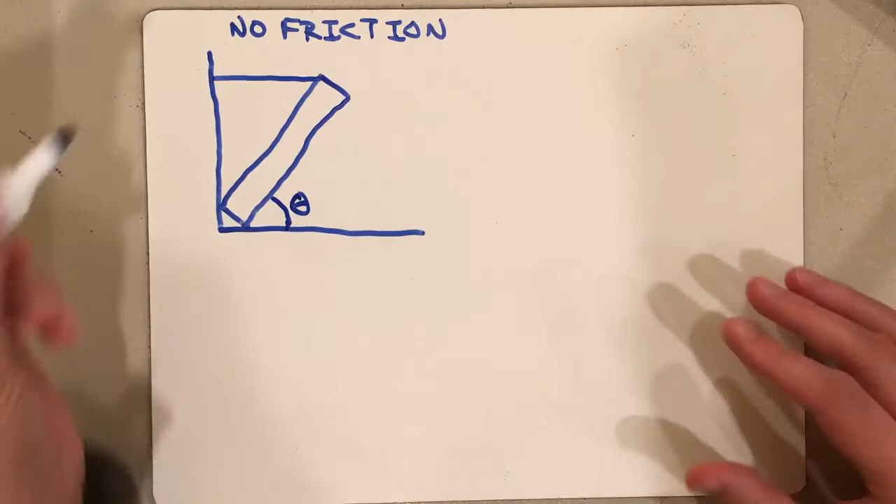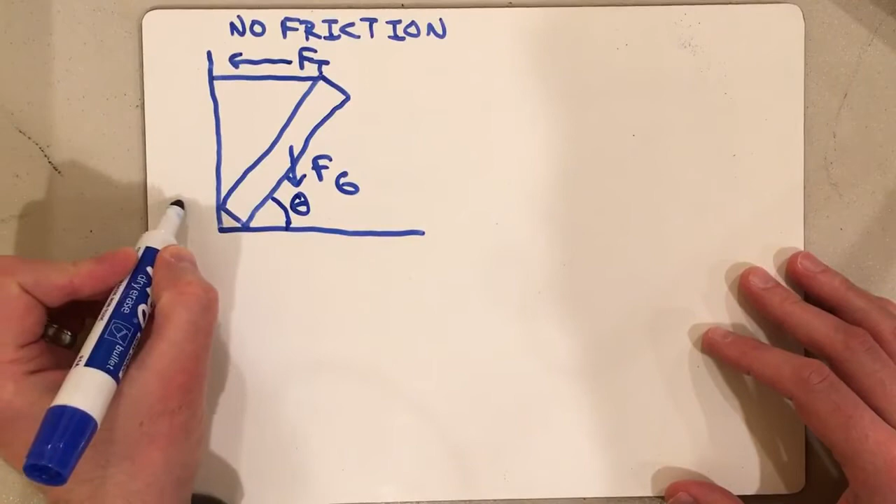The first thing I want to do is draw my forces. So of course I've got tension here, gravity pulling from the center, and here the two corners of this beam, one's touching the wall, one's touching the floor, there's going to be normal forces on each of these. So there's going to be a normal force going this way, which I'm going to call Fw for the wall. And this one I'll refer to as the normal force, but it's the normal force from the ground. This is the normal force from the wall.

So then, next thing to do is set up Newton's second law. I can start with my x forces. I have 2, so this is going to be Ft minus Fw equals 0. And I can deal with the y forces. This is going to be Fg minus Fn equals 0.

For both of these, this is equilibrium, they both equal 0. So I could have said Fw minus Ft equals 0, or Fn minus Fg equals 0. It doesn't change anything, the formulas are still equally valid. This is just how I chose to do it. But this is Newton's second law, both the horizontal and the vertical.

Now the next step for solving these kinds of problems, because probably this isn't enough to solve the problem, whatever it is you're looking for, you need to set up your torque equations. So the next part here, let's set up the torque equation.

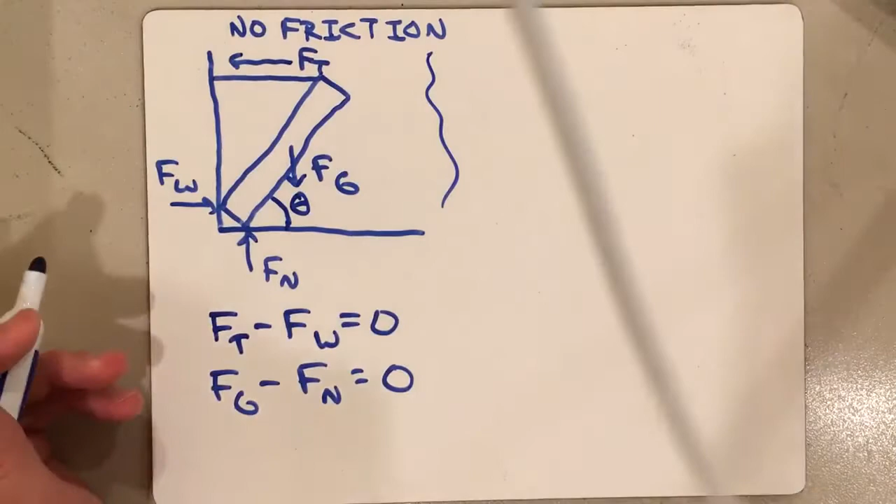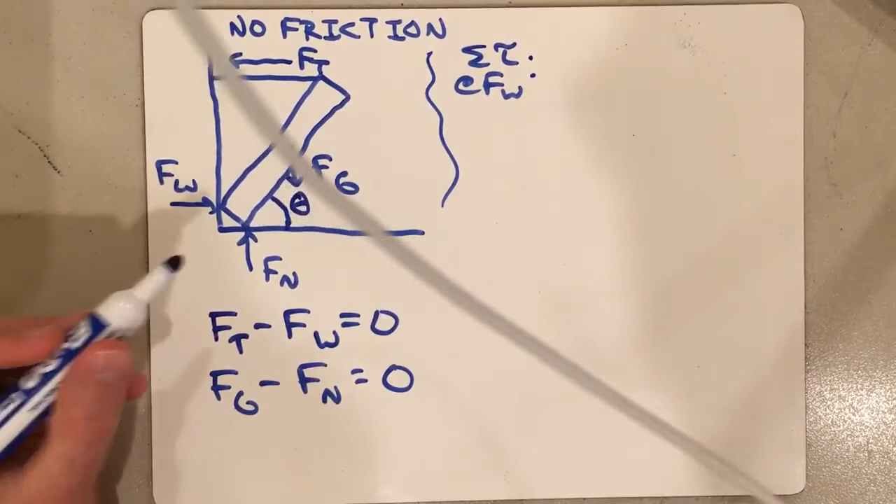I'm going to start with down here. So I'm doing sum of the torques, and I'm choosing at, say, Fw. Now Fw and Fn are essentially acting at the same point, so they're both at this rotational axis, so neither one is going to exert a torque about this rotational axis. Their lever arms are both 0. So I only have these two.

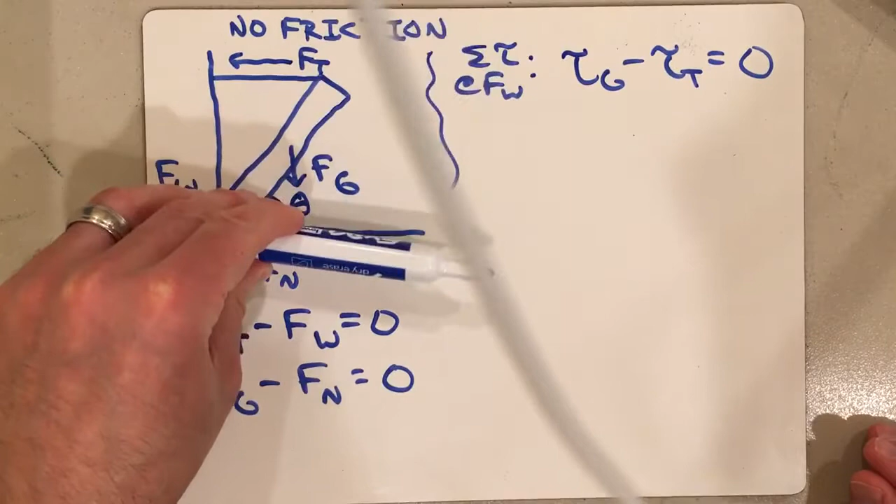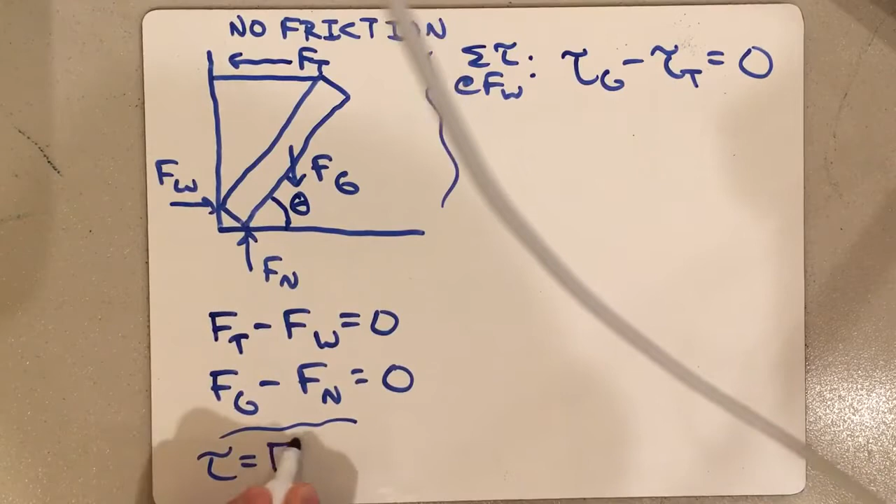So I've got the torque due to gravity minus the torque due to tension. And you can see these are opposing each other, these torques, because gravity would want the beam to rotate clockwise, but tension wants it to rotate counterclockwise. So they are opposing each other. Here we go for this torque. Okay, now let me just remind you, I'll write it down here. Torque is the force times the lever times the sine of the angle between the force and the lever.

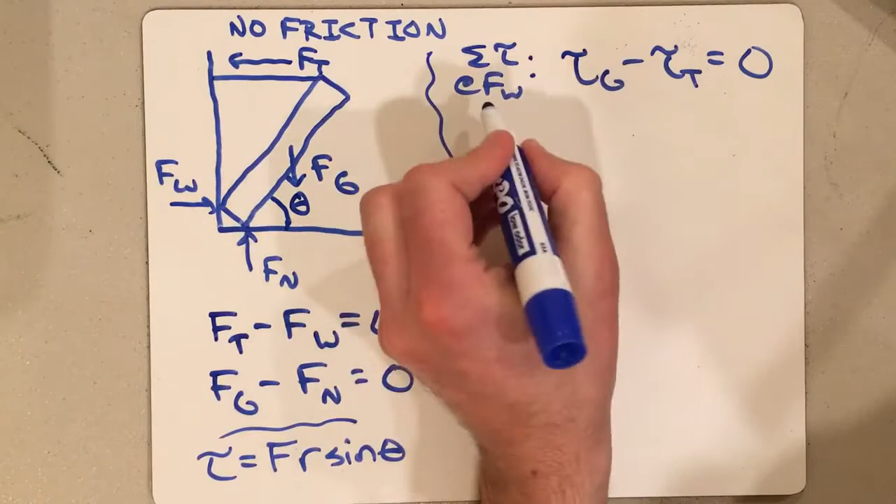So coming back up here for the torque due to gravity, that's going to be Fg. The lever, it's going to be half the overall length. So this beam has a length of, say, L, so this is half the length, so its lever is L over 2.

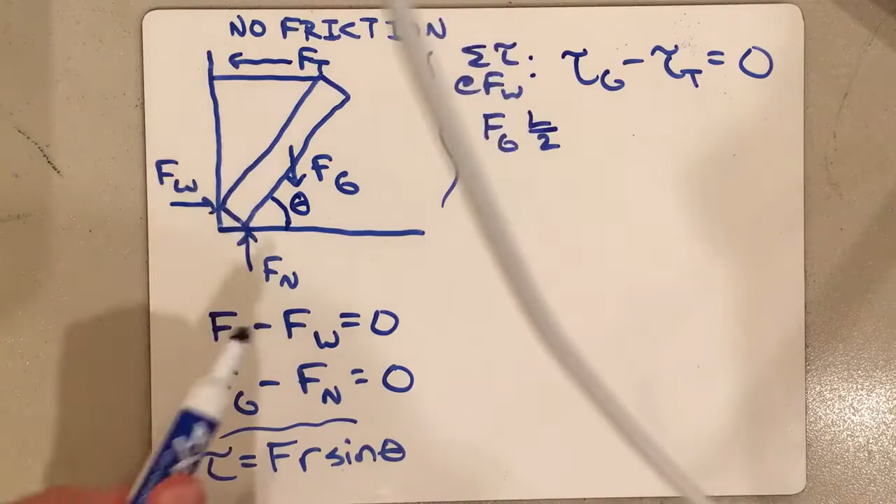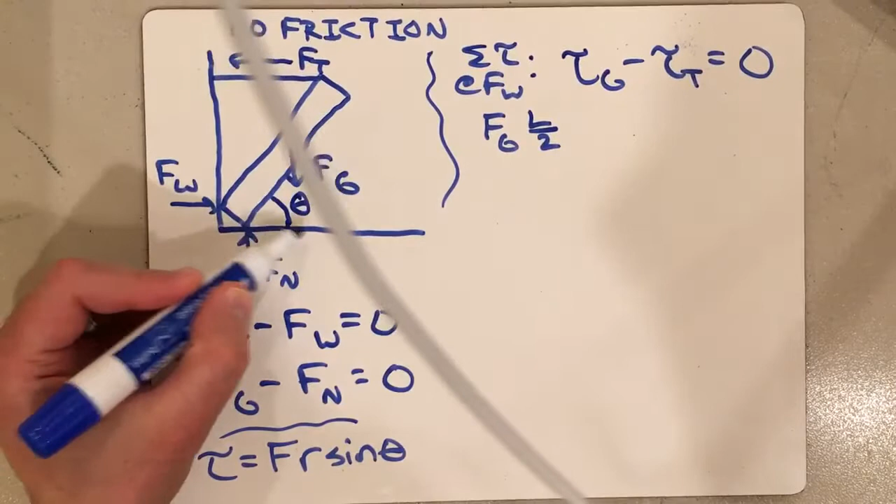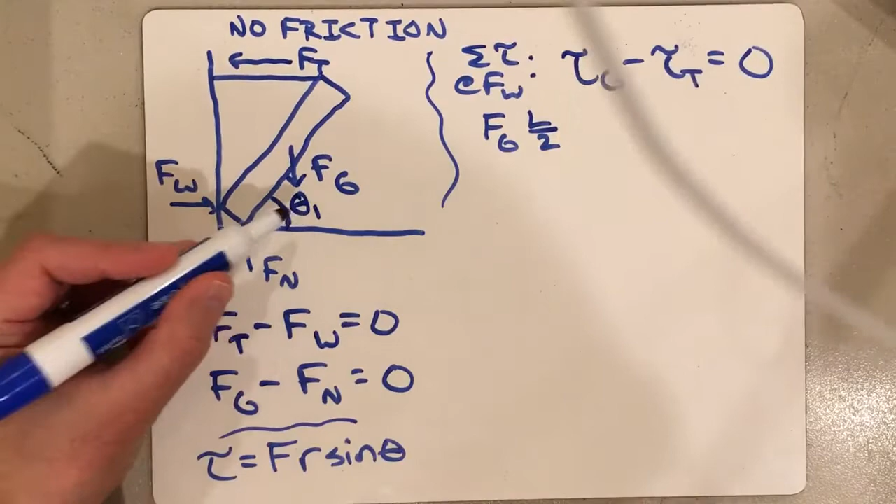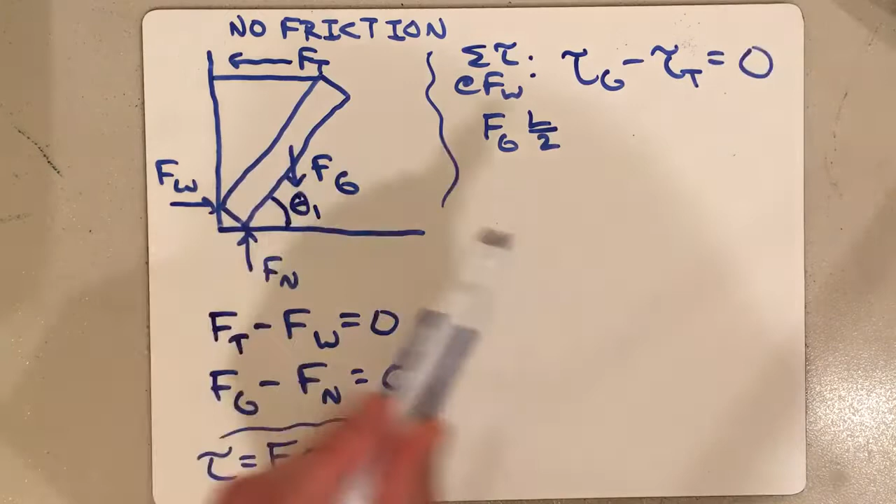And then the sine of the angle. I need the sine of the angle between Fg, which is vertical, and the lever, which is parallel to this beam. Okay, well, here we have the angle between the beam and the horizontal, that's theta. So that means it's kind of a bad choice here, calling this theta and theta. We're stuck with it. Anyway, so using this angle, which is for my actual problem too, but let me just call this theta 1, just to differentiate it from this general angle. Okay, so this theta 1, this is the angle to the horizontal, but I really need the angle between the lever and Fg, so that's going to be the sine of 90 minus theta 1.

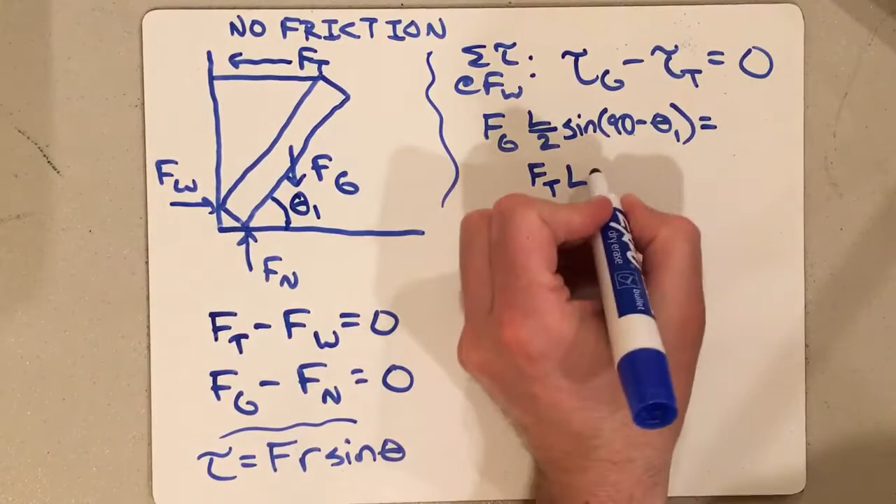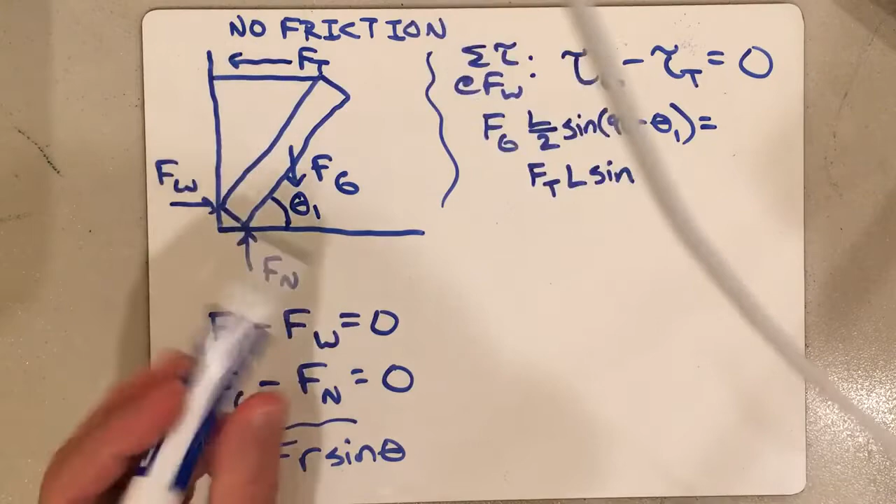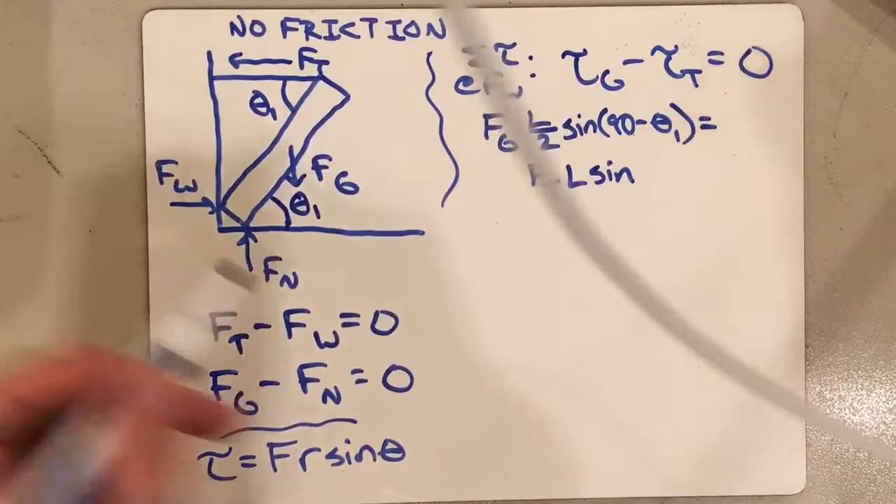And that's going to have to equal, now my torque due to tension is going to be Ft. The lever is the whole length of the beam, L. And that's going to be the sine. Now here, I need the angle between the lever, which is again parallel to the beam, and the tension, which is horizontal. So this angle here, this is just geometry. What is it, opposite interior angles or something like that. But because this is horizontal, this is horizontal, these are parallel lines. But anyway, this has to be theta 1. So this is just the sine of theta 1. So there's one torque equation right there.

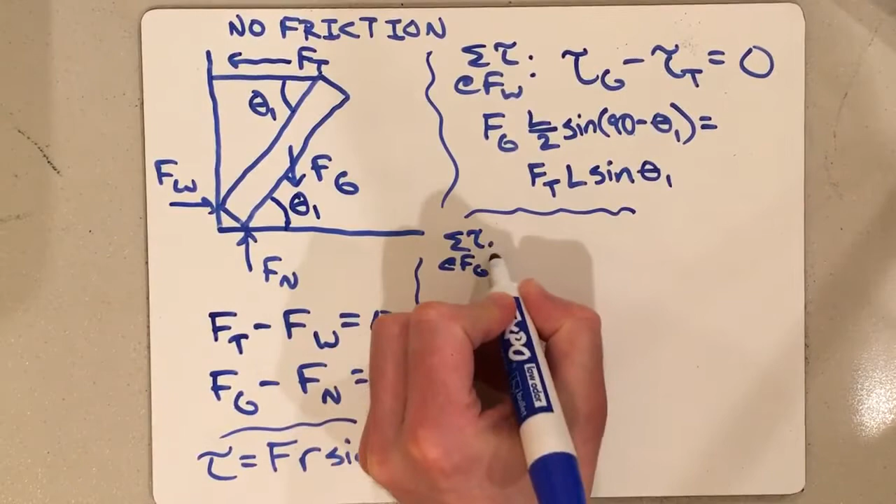Now I can choose again a different rotational axis. I could choose to do the sum of the torques at FG. Okay, so if I'm doing the sum of the torques at FG, this is now my rotational axis. So I'm going to have the torque due to tension.

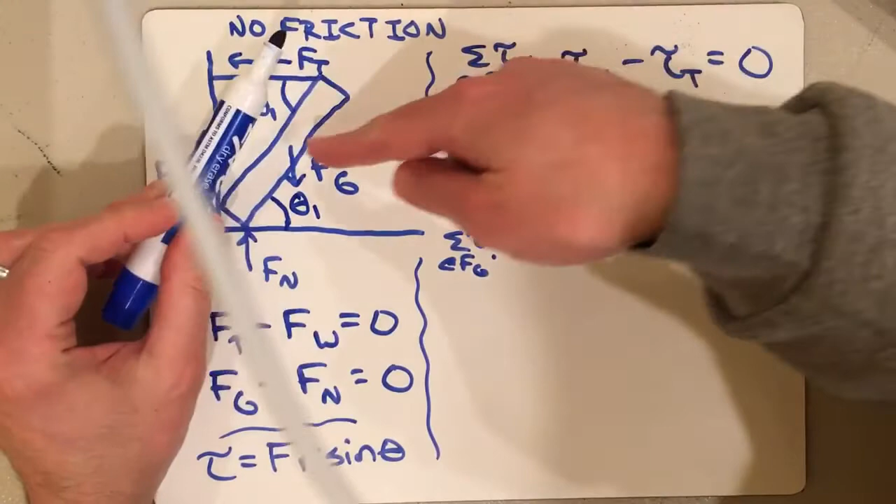Now, tension wants it to rotate, if this is the rotational axis, tension wants it to rotate counterclockwise. And in fact, so will Fw. Fw wants it to rotate counterclockwise, but Fn wants it to rotate clockwise. So I would do the torque due to tension plus the torque due to the force from the wall minus the normal force from the ground. That has to equal 0.

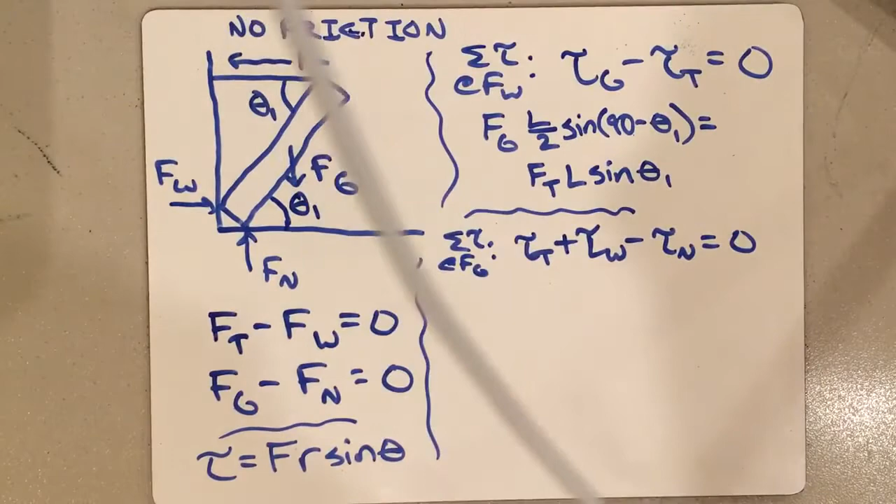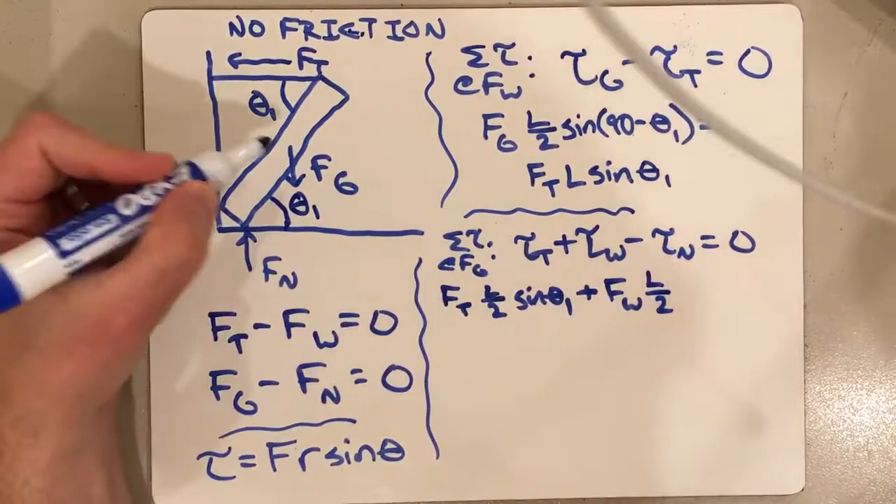Okay, now I set up my, now I can go in and plug individually. So for tension, it's the force of tension. The lever is now half the length, but it's still the sine of what I'm calling theta 1. For the wall torque, so that's Fw, it is also L over 2 away from the rotational axis, because again, the rotational axis is right here in the middle where Fg is acting. It is also acting horizontally, and so it's also going to have an angle of theta 1 with its lever.

And then for the normal torque, the torque due to the normal force, that's going to be Fn, again, L over 2, but this is acting vertically just like Fg was, and so it's the sine of 90 minus theta 1. And that's the torque equation. I can do one more torque equation.

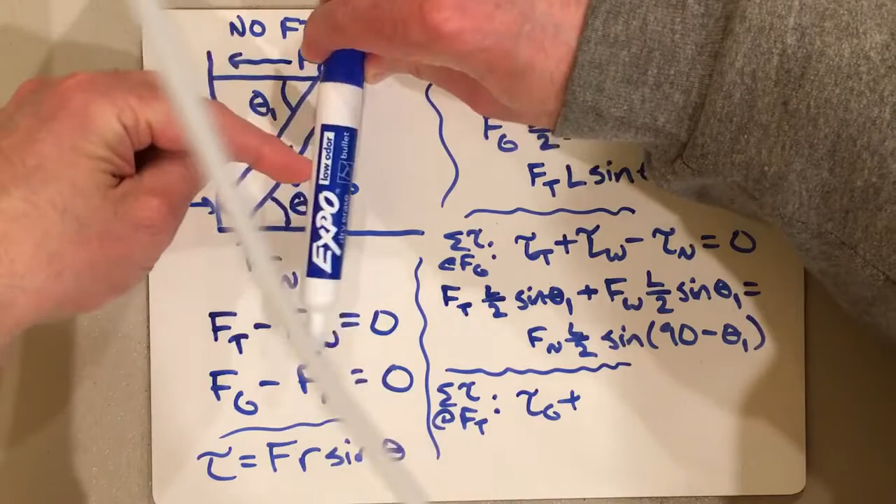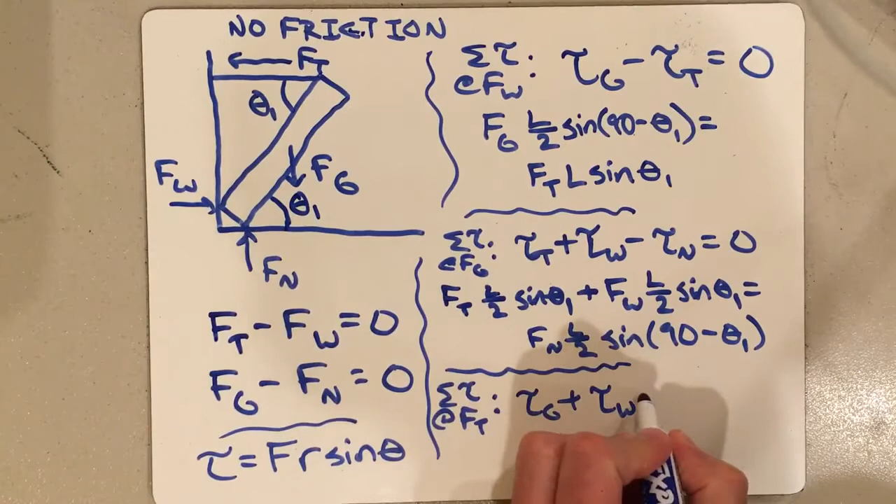Sum of the torques, my last remaining point is up here at Ft. And so we're going to have the torque due to gravity. Now gravity, if I'm up here, gravity wants, if this is the rotational axis, gravity wants it to rotate counterclockwise. And so does Fw. Fn wants it to rotate clockwise. So the torque due to gravity and the torque due to the normal force from the wall are going the same direction. Torque due to the normal force from the ground is going the other direction. So that's why I'm subtracting it.

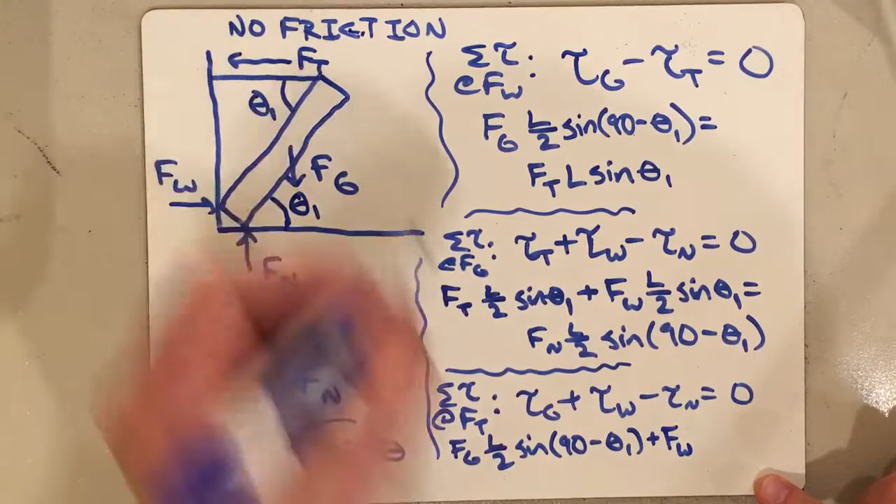So now we just set up our formula. So Fg, which is L over 2 away from the rotational axis, which is up here, and I already know that's a vertical force, so again, it's going to be 90 minus theta 1. Plus, this is going to be Fw. It's L away, so L, and it's just the sine of theta 1. And that has to equal, and then I do the Fn, and Fn is going to be Fn times L times the sine of 90 minus theta 1.

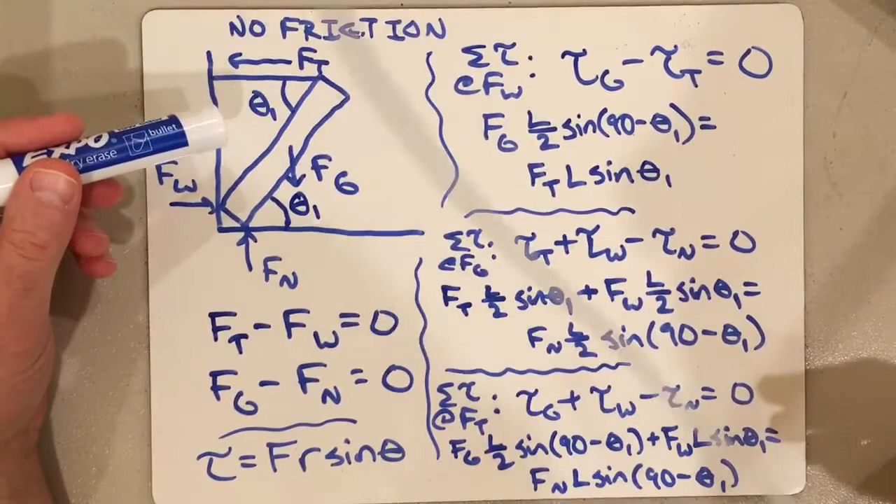Now all I'm doing here is just reiterating the approach, showing what you have to do. You have to draw your force diagram, and you need to be precise in where you draw the forces. You have to set up Newton's second law. You have to set up torque equations. Now, there might be the odd problem you don't have to set up Newton's second law. You can get away with just a couple of torque equations. Or maybe there's the odd problem where we've already solved problems where we don't need the torque equations, right? We can just use Newton's second law. But the problems in this unit, generally you're going to have to set up torque equations. In fact, I can guarantee you're going to have to set up at least one, probably two torque equations, and often you're going to need Newton's second law.

This is the approach we're using. Yes, there are other things you have to do. Obviously, you've got to be able to stick in some of the other formulas we've learned, such as how to calculate FG. We've got a general formula for that. And there are other just standard algebra techniques that you will need to use as you're going through and solving these. But this is the approach, and that's what I'm trying to show you in this example and the other example that I posted in the homework.